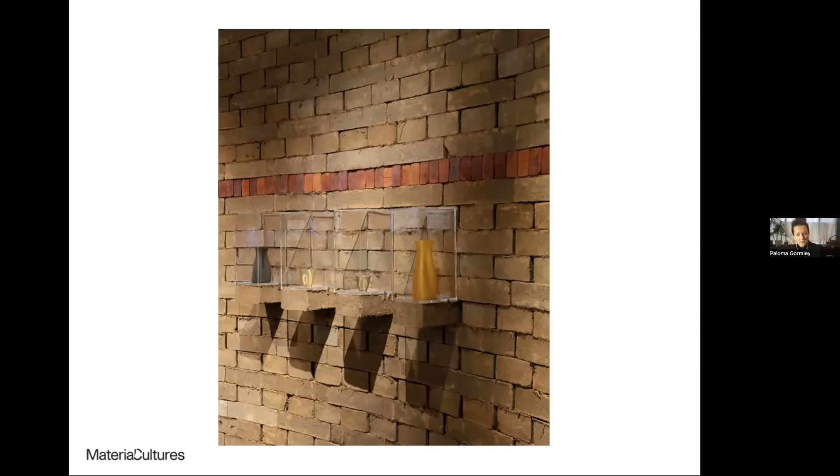Our work encompasses advocacy through design and curatorial work, where we can demonstrate the beauty, the adaptability, and the practicalities of working with low embodied carbon materials, as well as the extraordinary impact that they have on the thermal performance and embodied carbon of our building stock. Sorry, I lost my way. They also have extraordinary potential to make beautiful contemporary buildings.

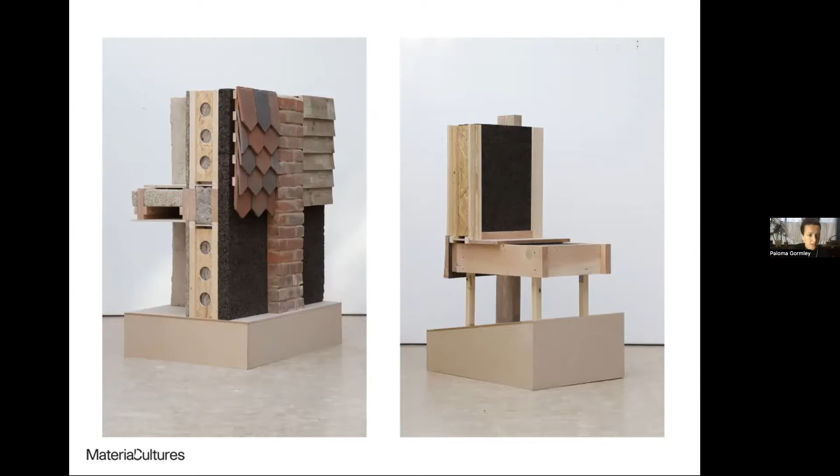We teach currently between the three of us, both at Central St Martin's and the Architectural Association. In this project, which is called Carbon Copies, our master's students investigated the impact of translating a series of iconic residential typologies into a fully bio-based low carbon material palette, building fragments of them at 1:1, which you can see here.

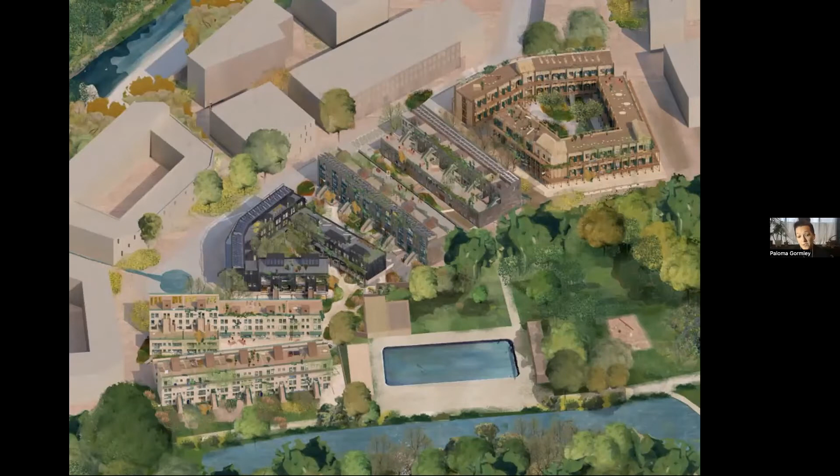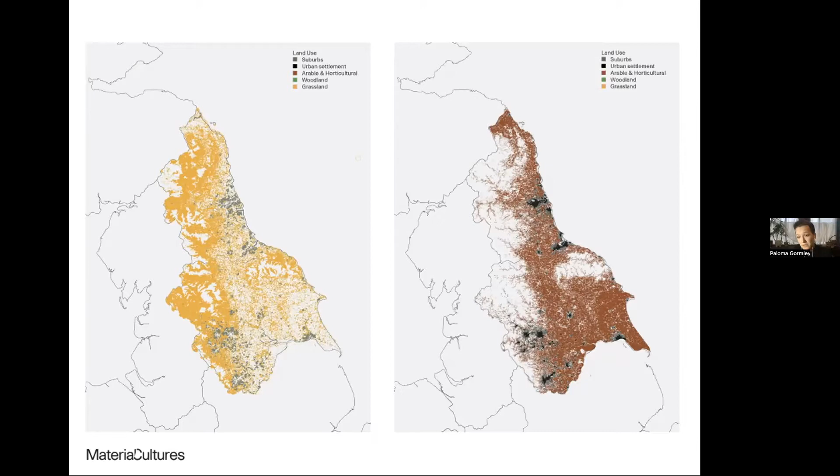We also design buildings and construction systems, and systems that can be applied at scale to new build developments. So we work with clients to develop urban propositions which can be integrated into off-site fabrication strategies, working with regional bio-based material supply chains. We also carry out research, so into materials and their application in construction, as well as their impact on our culture and our landscape. So to give you a bit of context of our work, we're looking to support systemic change in the construction industry.

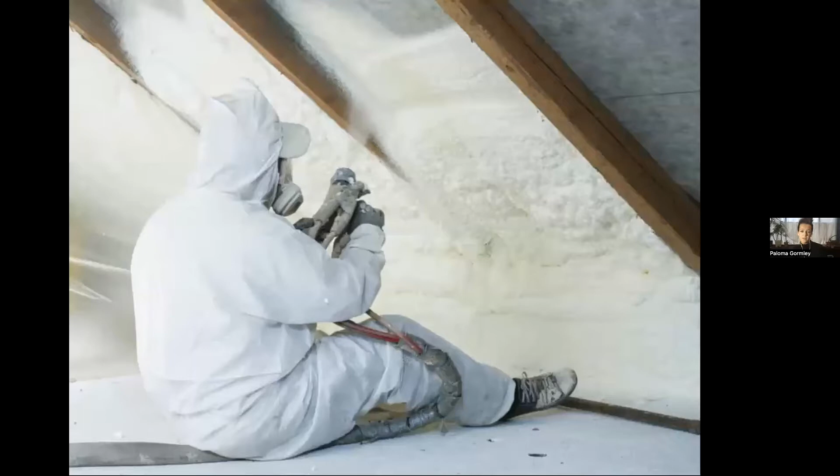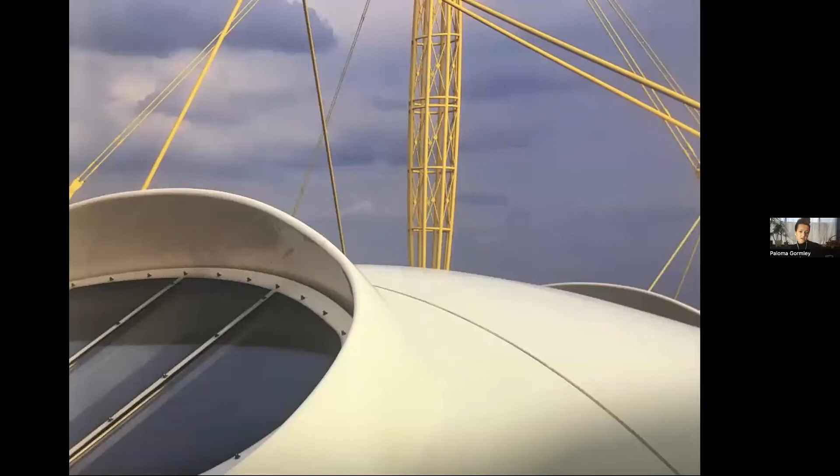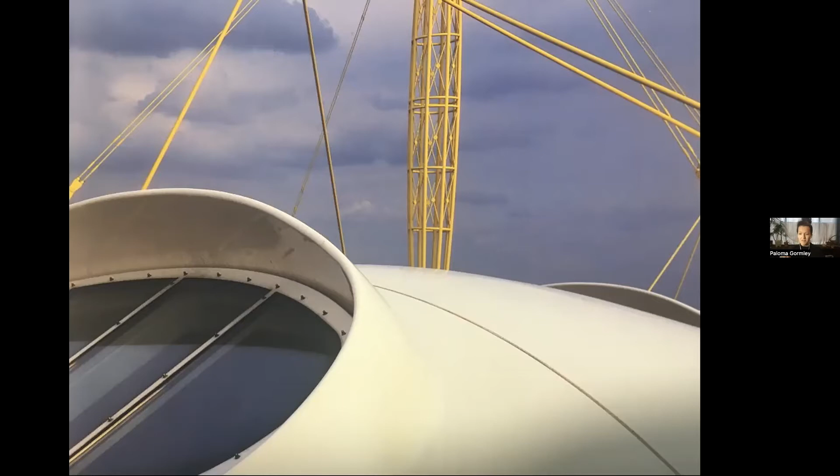And for the last 50 years, we've been using crude oil to try and solve the problems of sustainability in architecture. Our construction industry has produced a multitude of oil-based insulating and high-performance products, from polyurethane and polystyrene insulations to nylon thermal resistors, PVC, airtightness membranes, etc. And we develop construction technology using materials like steel and aluminium and glass, whose availability is dependent on a vast quantity of cheaply available oil, such as air conditioning systems, heat recovery units, triple glazing. These technologies are neither durable nor are they expected to last.

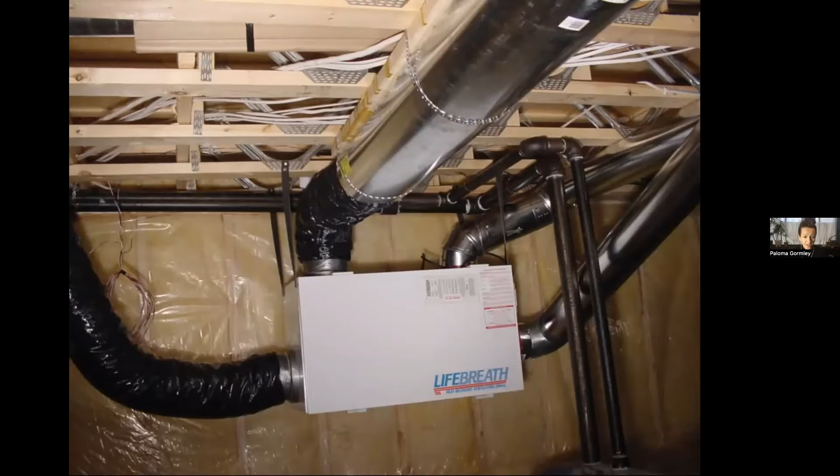Most contemporary buildings require specialist knowledge and equipment to maintain, knowledge that's easily lost, often economically inaccessible to people, and depending on parts that readily go out of production. This technification of architecture has concentrated power in the hands of the technocrats. Our current material culture transforms vast quantities of extracted material into vast quantities of waste, and it does so extraordinarily efficiently. This is the oil age of architecture.

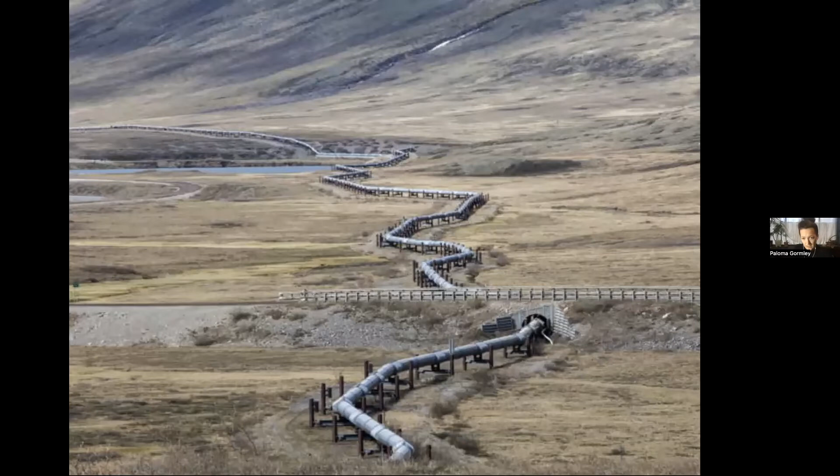The circular economy is the idea that in order to think meaningfully about sustainability in relation to human production, we need to consider the entire life cycle of everything that we produce. And embedded in this are three key material cycles, so composting, recycling, and reuse.

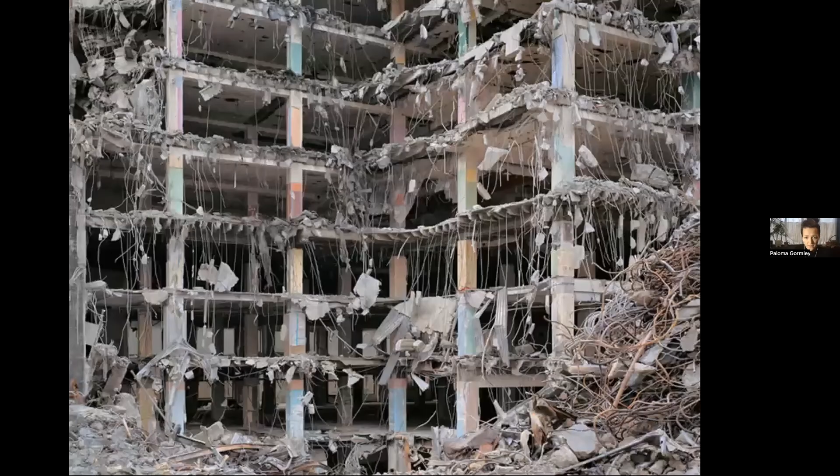Due to the number of components and their complex dependencies, implementing reuse and recycling in construction in a meaningful way represents an immense and potentially insurmountable logistical challenge. Ultimately, it demands vast warehouses, distribution networks, and mass standardization. It must also acknowledge the inevitable entropy and significant loss of energy, carbon, functionality all along the way, and the significant energy required to redistribute and recycle elements.

Yet it is interesting that of the three cycles, composting, recycling, and reuse, reuse and recycling seem to be receiving the most investment. Why? Perhaps because reuse and recycling maintains the logic of capitalist growth. The often fanciful narrativization of the future justifies the continued use of the high energy materials that we've become so dependent on, and allows us to maintain the status quo. These narratives often ignore the inevitable externalities of these processes.

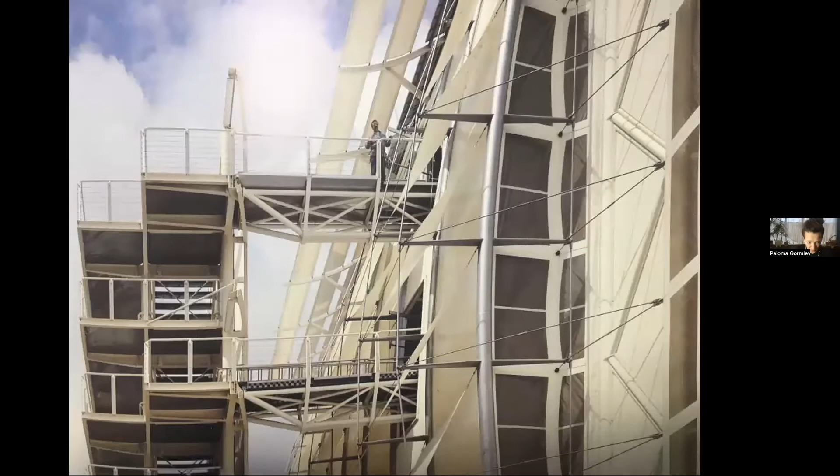So every time, for example, that we recycle plastics, we reintroduce particles into our waste streams, into our environments, and into our oceans. We are fast learning that we need to remove plastic from our material cycles, not perpetually reintroduce them. Reuse and recycling very quickly become highly technocratic.

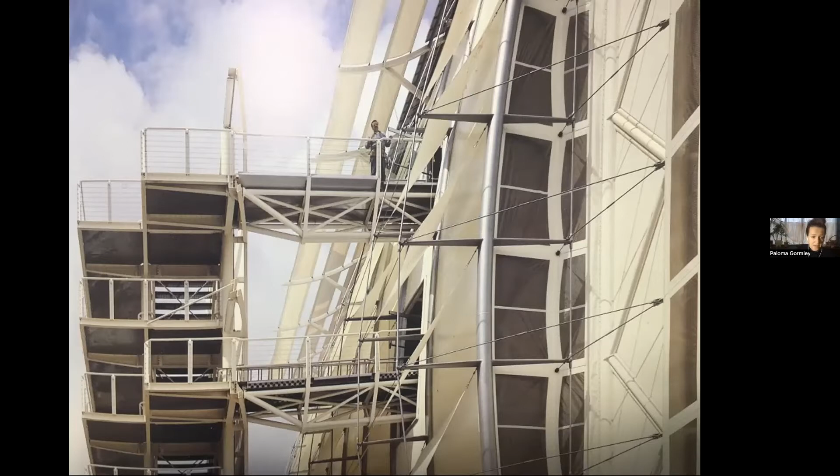Standardization means fewer authors, and we lose sight of architecture as a crucial mode of cultural production, and further consolidate the almost total monopoly of the white, male, and technocratic author. Or perhaps, as bell hooks might say, in this move towards standardization, you can see the mechanisms of the white supremacist capitalist patriarchy at work.

The reality is that the circular economy is not possible with the materials that we currently depend on. So what's the alternative? And how do we respond to the evolving needs of society without the disastrous effects of our current modes of production and growth? This is how nature deals with waste, through composting, fermentation, microbial digestion, and decomposition. These processes reintegrate matter into natural carbon cycles, where it has the ability to regenerate and regrow.

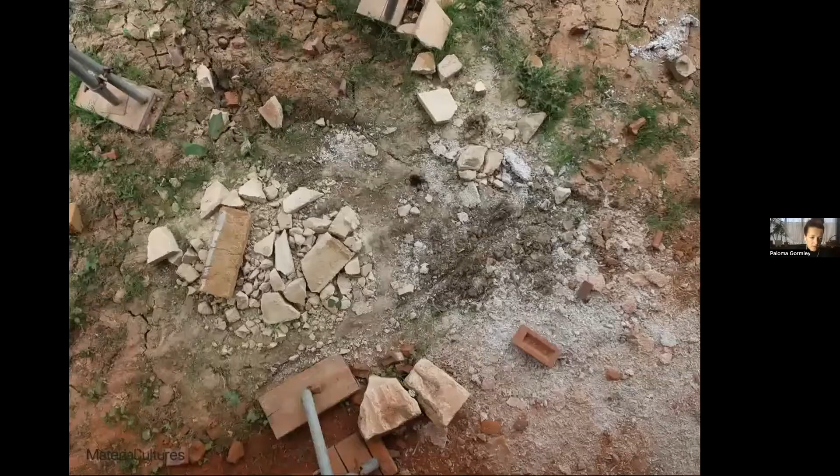At Material Cultures, we are interested in what happens when we work with construction materials that can remain part of biochemical and nutrient cycles. A mode of construction where at the end of the life, the constituent parts of a building could simply return to the ground. In this mode, materials are not contaminants, they come from and they belong to the landscape. And this is how things were made for thousands of years.

Biological processes such as anaerobic digestion can transform waste into things like biogas, which is already happening at scale across Europe. Limes and clays have for centuries undergone careful fermentation processes in order to condition them and improve their performance. This is material technology that is also at risk of being forgotten. These materials have an inherent plurality. They can accommodate many authors and unlimited standards.

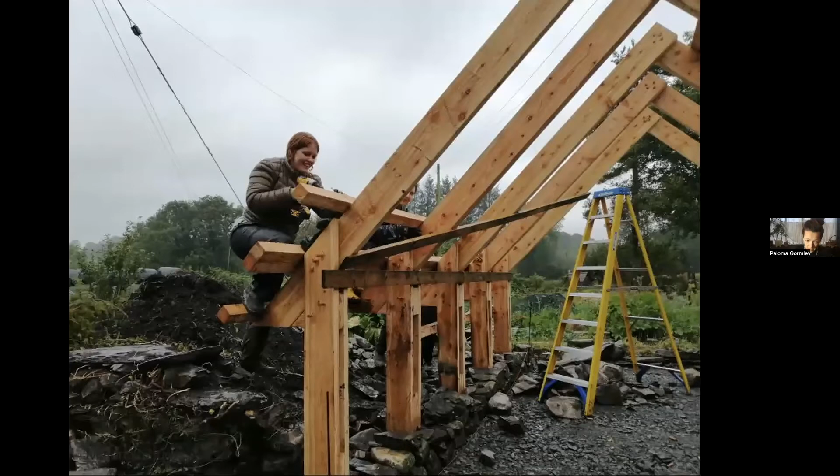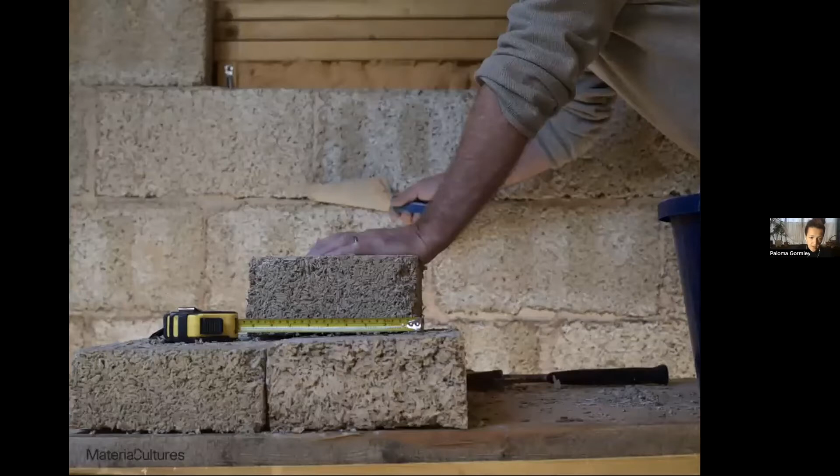In fact, bio-based materials generally sequester rather than generate carbon. They're accessible, they require few specialist tools, and you can work with simple detailing in construction and there is often something intuitive about working with them. They allow architecture to be culturally generated and perhaps suggest a different type of relationship to a building, situating architecture in relation to care. A care which requires human investment and a different set of relationships to place and the formation of new cultures.

Bio-based materials can be produced efficiently at a regional scale and integrate with existing crop cycles. So the other implication is the possibility of architecture to rebuild a direct relationship to place. This means things traveling less far and therefore it being easier to return and to assimilate them back into the ecosystem. In this way, you can see building as a gathering up of bits of the landscape.

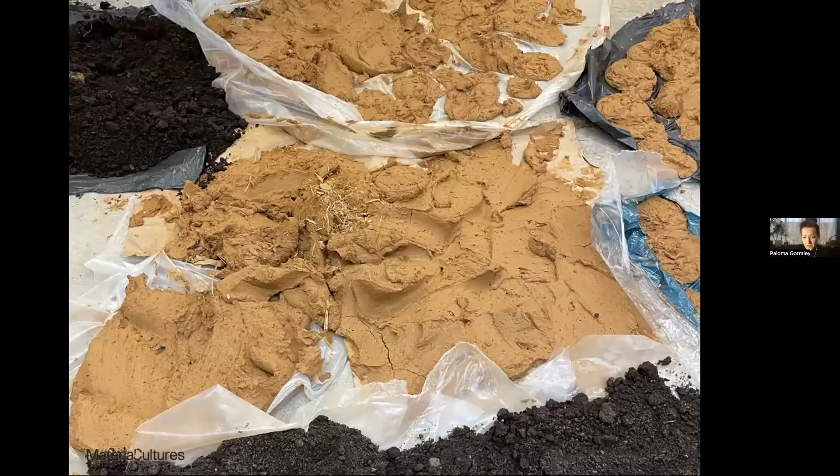Coming straight from the ground, these materials invite direct contact, experimentation, and play. And this is at the center of our practice, Material Cultures, as there is still a huge amount to learn and to relearn. Perhaps this direct relationship with materials is a way for us to find new languages that have the potential to supersede those we've inherited from a historically narrow lineage of authors.

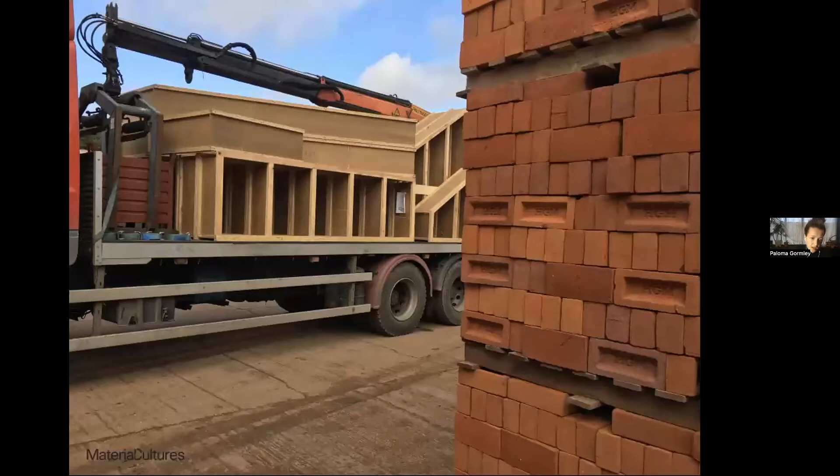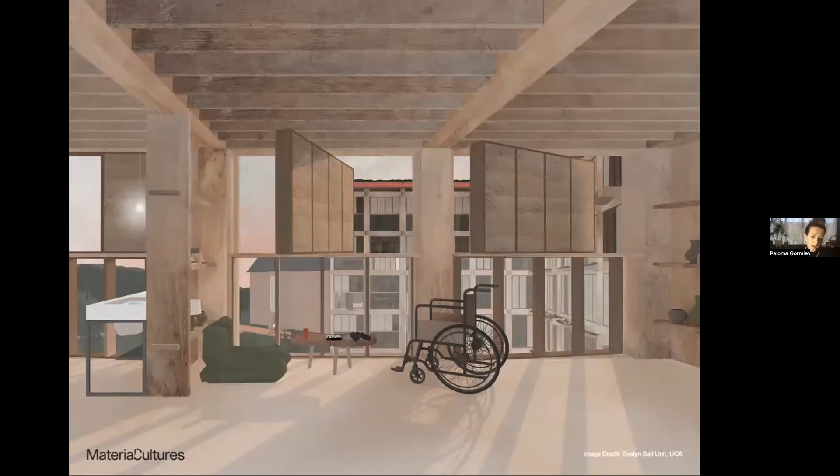Our approach might be considered Arcadian, but we're also interested in the role of contemporary tools and modes of construction, meaning building off-site where practical and working with efficient forms of mass production. The problem itself is massive and it needs to be met at scale. So in order for change to come quickly enough, the status quo needs to be challenged on ecological and economic terms. This means embracing digitalized construction processes where repetitive, non-specialist labor is carried out by machines.

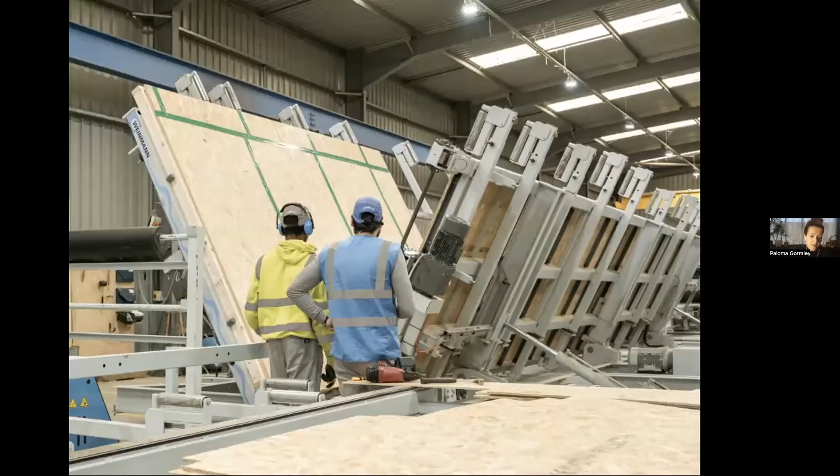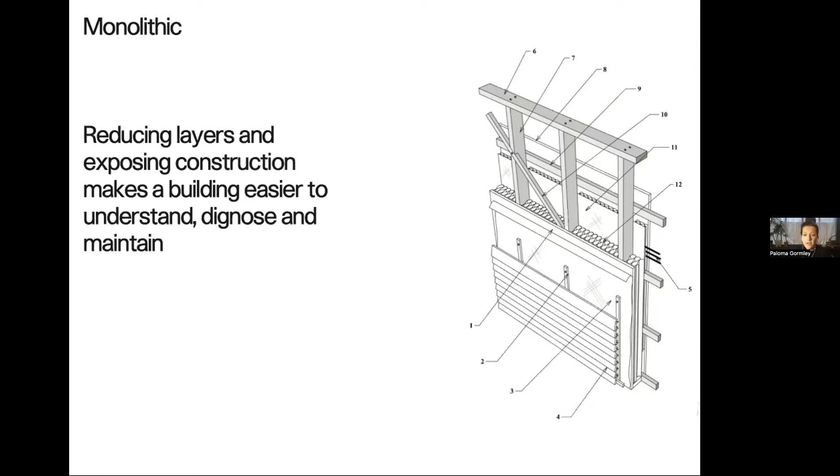And off-site, we have the ability to improve working conditions, change cultures, and to reimagine factories as sites of creativity and cultural production. So from our work over the last decade, we've developed a set of principles. These are around monolithic construction, so moving away from this contemporary, very layered mode of making buildings.

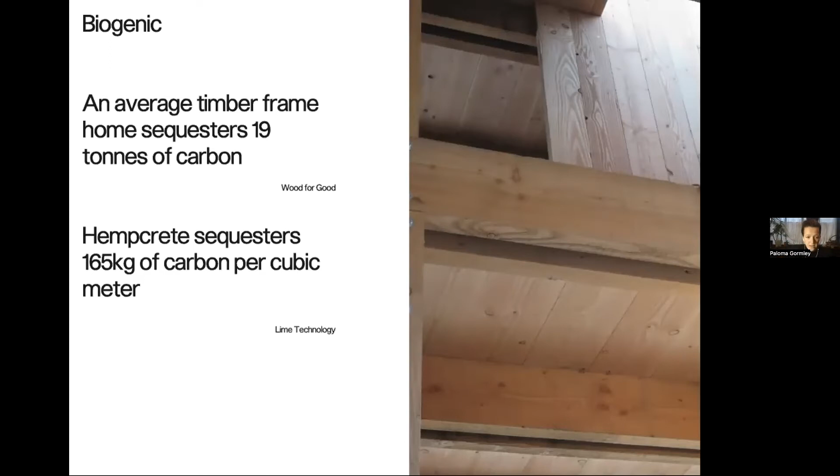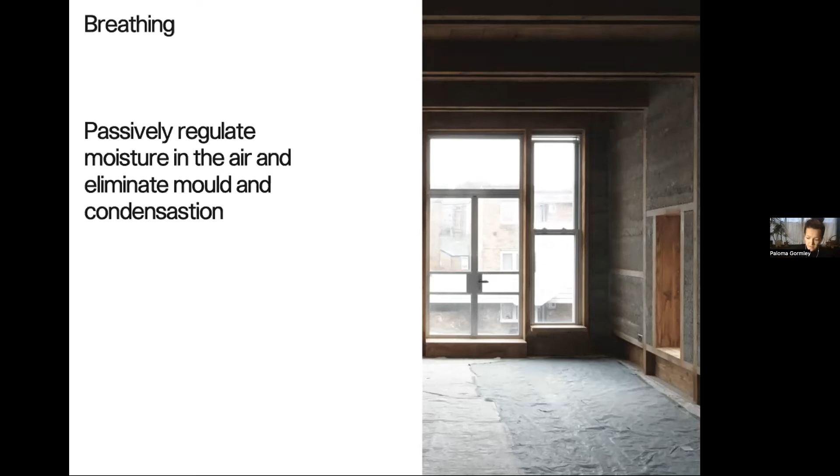Thinking about sequestration wherever possible, so building in bio-based materials that sequester carbon over their growth span, which is then locked away in the fabric of the building. Breathing construction: buildings historically all used to breathe, and it's only relatively recently that we introduced membranes and this idea of non-breathing construction. So returning to breathing construction, which also brings passive regulation of humidity and all kinds of other benefits.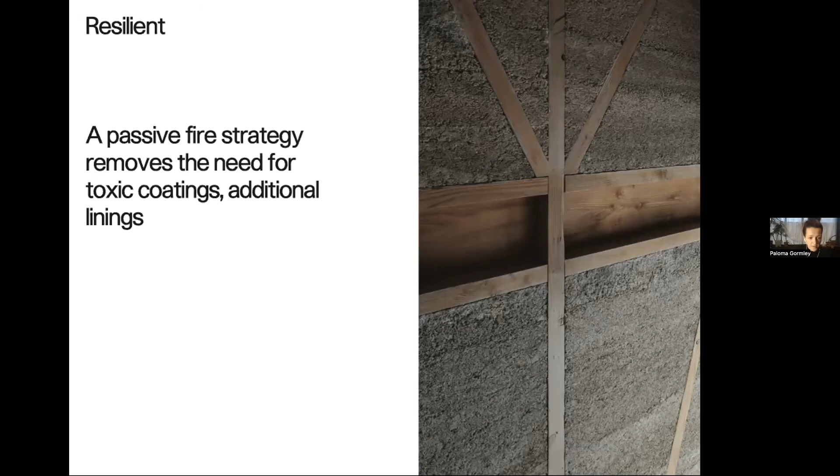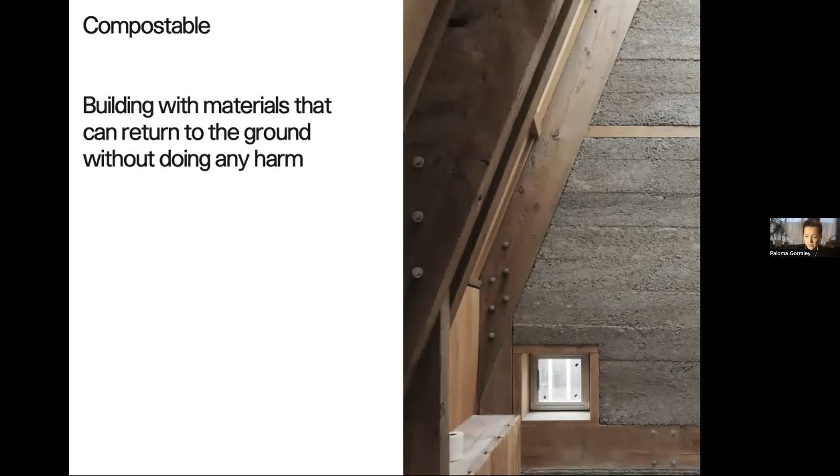Building resiliently, so rather than using toxic intumescent coatings, thinking about how the materials themselves can have integrity in response to fire and other environmental conditions. And making buildings compostable. Ideally, components of the building would be recycled, but ultimately at the end of their life, we aim for the materials that we use to be returned to the ground as compost. And then scalability, this is really at the core of what we do. So using experimental projects to think about how these ideas can go mainstream, essentially.

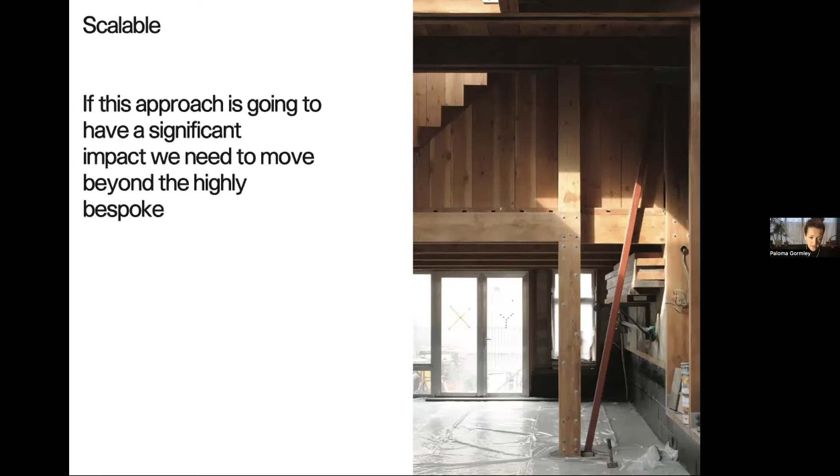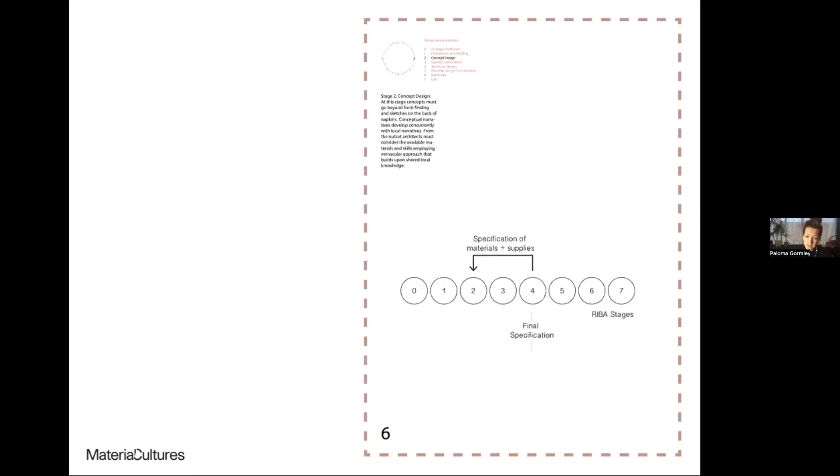One of the things that needs to happen in terms of the architectural design process is rethinking at what stage different things happen. A key thing for us is shifting the specification of materials much earlier on in the design process, understanding the capacities and limitations of the materials that are regionally available. This might, for example, mean designing a structure around a greater number of smaller timbers rather than fewer larger timbers. So the material availability begins to determine an overall construction system and the logic for construction.

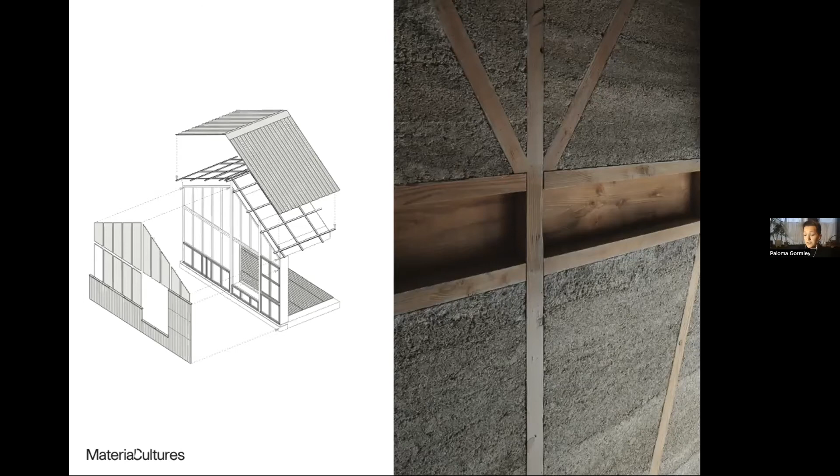And in looking to design out concrete wherever possible, we're developing alternatives for foundations that respond to geology using materials such as chalk, for example. And we're working with organisations such as Local Works in the UK to further explore the potential of chalk for cladding and finishing applications.

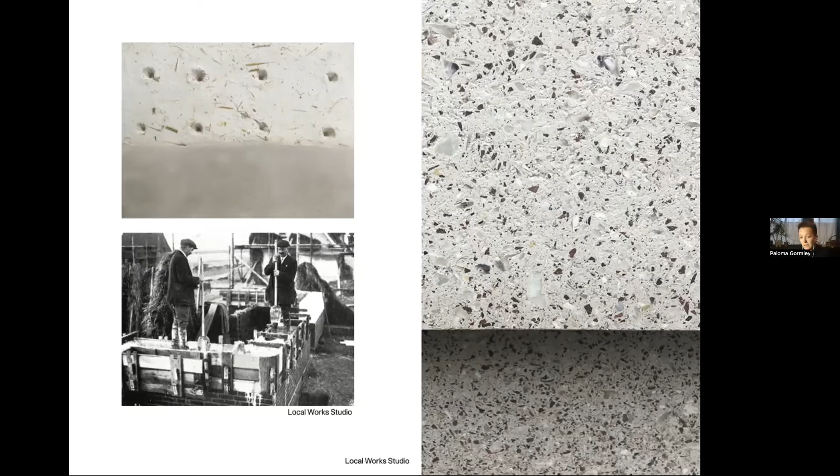Beyond timber, we've been working with a variety of bio-based feedstocks. Unlike trees, whose crop cycles are measured in decades, materials like straw and hemp are harvested annually. And hemp in particular has an extraordinary capacity for sequestering carbon, both in the plant matter above ground, but also they recarbonize the soil with their long tap roots. The stem of the hemp plant is composed of a woody core known in construction as the shiv or hurds, and an outer layer of fiber.

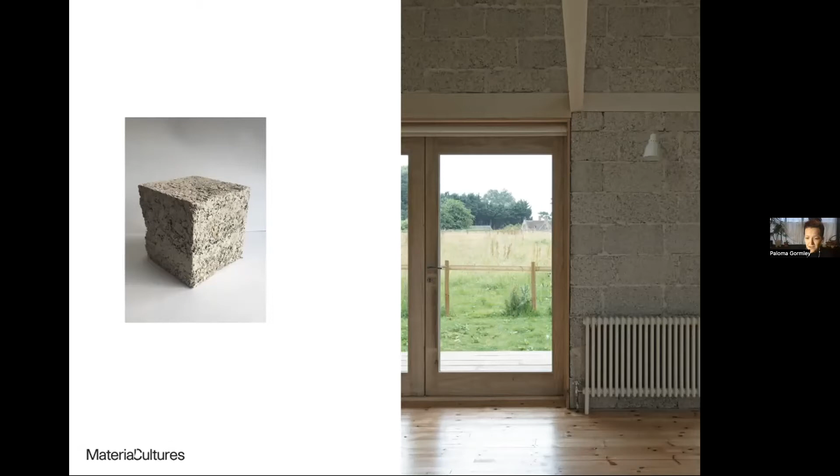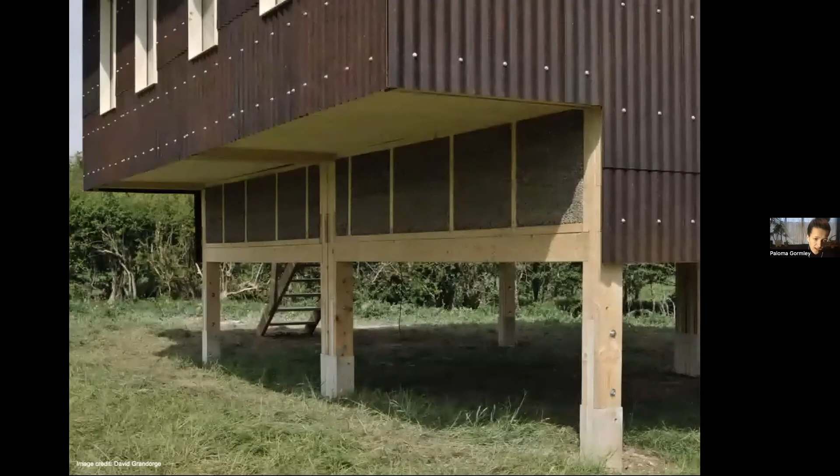When you combine lime and hemp shiv, you get a crude monolithic material known as hempcrete. This can be cast into blocks and laid with lime mortar as if they were cement blocks. It can also be cast in situ against shuttering. The sequestered carbon is held in the organic matter until the end of the building's life. The shiv holds the air and acts as an insulator and gives mass and bulk to the material, and then the lime binds the shiv together and makes the mix highly fire and mold resistant.

The fiber has any number of applications. It's used in textiles, it's used in rope, it's incredibly strong and durable, and we've been working with it in other applications such as cladding, working with bio-based binders.

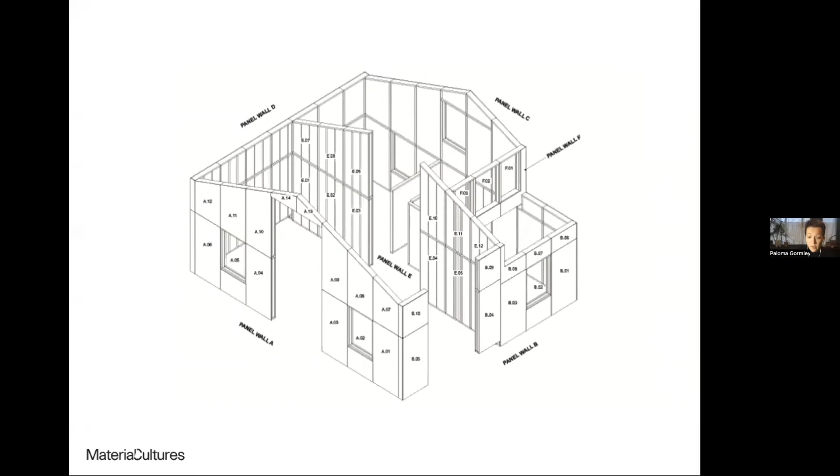So for Flat House, we explored this cassette-based system. There are limitations with casting in situ. It brings a wet and messy specialist trade to site, and the drying times also limit the seasonal construction window, and they elongate programs due to long curing times. You can't apply the finished layers sometimes for months. So we developed a system of precast panels that can be made in the factory, and this means they can be pre-dried and assembled on site in a matter of days.

We're developing proposals for how these ideas that we developed for Project Flat House can be applied on an urban scale. Looking at how on-site microfactories can produce the construction components and how modular systems can be used to create rich and varied streetscapes. Places with character and texture that can support many forms of life, and that rather than degrading over time, age beautifully.

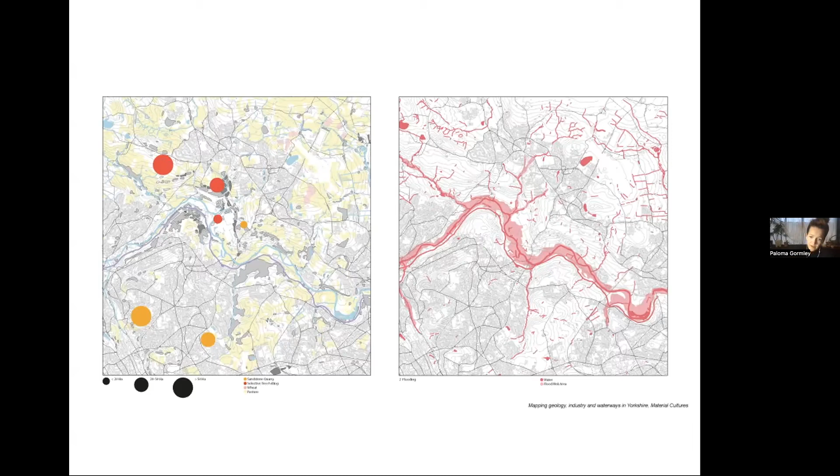But are we beckoning in a new era of ever more intensified industrialized agriculture? And can this be mitigated? What other non-human systems are dependent on the landscape, and how can we maintain them in the process? Last year, we worked with the North East and Yorkshire to develop a strategy for a bioregional construction economy. We looked at how to enable the production and take-up of bio-based products and how agroecological processes might be integrated into this transition and what their impact might be on our landscapes.

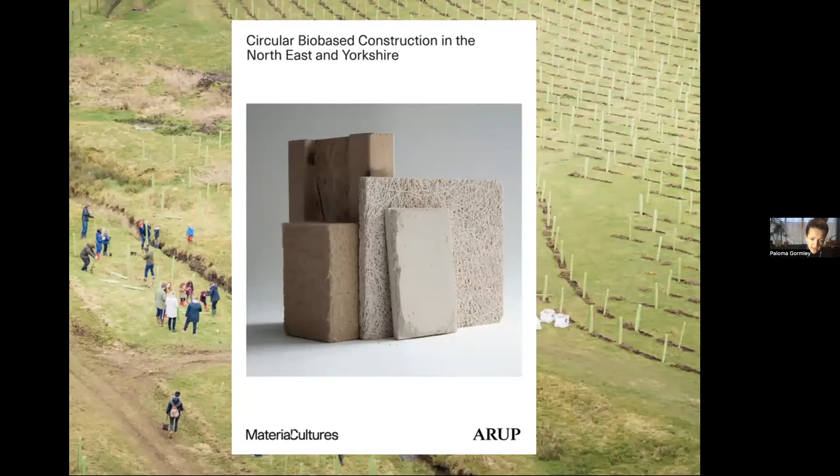The report was developed collaboratively with our partners Arup, and the research looks at the viability of the circular and bio-based construction economy, from the potential benefits of a transition, as well as the limitations of the one today. We also looked at the actions that the industry needs to take to achieve a cleaner, decarbonised construction industry and to bring about systemic change.

We looked at how you can begin to quantify these benefits. So we started with counting and a detailed analysis of the local plans of the 31 local authorities within the North East and Yorkshire. It's estimated that approximately 30,000 homes need to be built annually, or 500,000 homes by 2038. In embodied carbon terms, and using today's benchmarks, this would generate more than 26 million tonnes of embodied carbon.

So we looked to develop a model through which we could assess the potential long-term impacts of a bio-based industry. And so we picked as our subject a new build 3-bedroom semi-detached house, analysing the impact of this generic type of suburban home on the landscapes of the region. We carried out our analysis by reviewing the impact of switching out 3 crucial material applications in the building: the structure, the insulation and the lining. Many of the findings set out are directly applicable to retrofit projects as well.

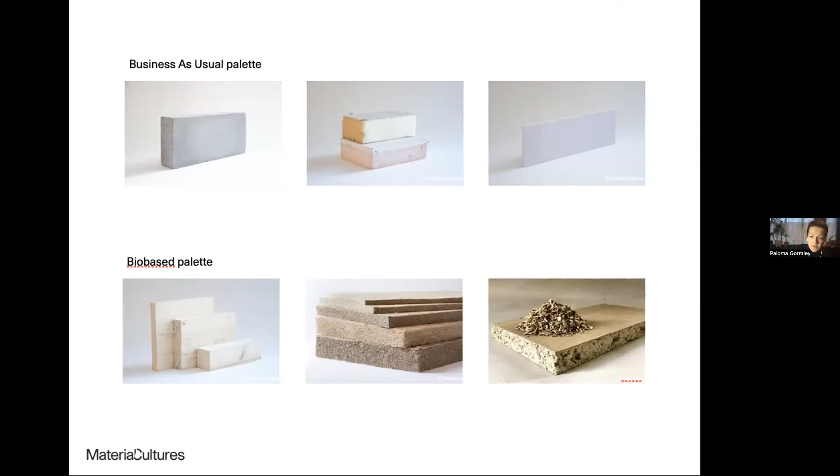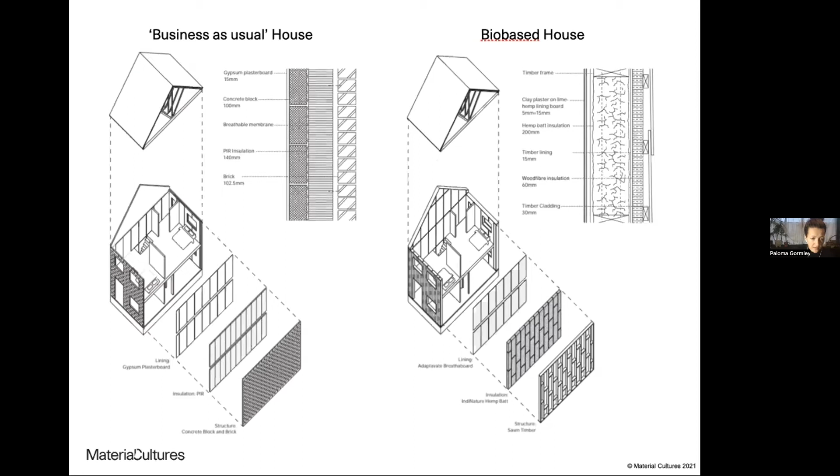So we carried out an embodied carbon assessment on the superstructure of both the business as usual and the bio-based small-scale residential home. Both were designed to contemporary building standards, so they had the same level of thermal performance. On the left, you can see a breakdown of the embodied carbon and the associated sequestered carbon for each of the designs. And on the right, you can see the net embodied carbon associated with these components, i.e. the embodied carbon subtracting the biogenic contribution.

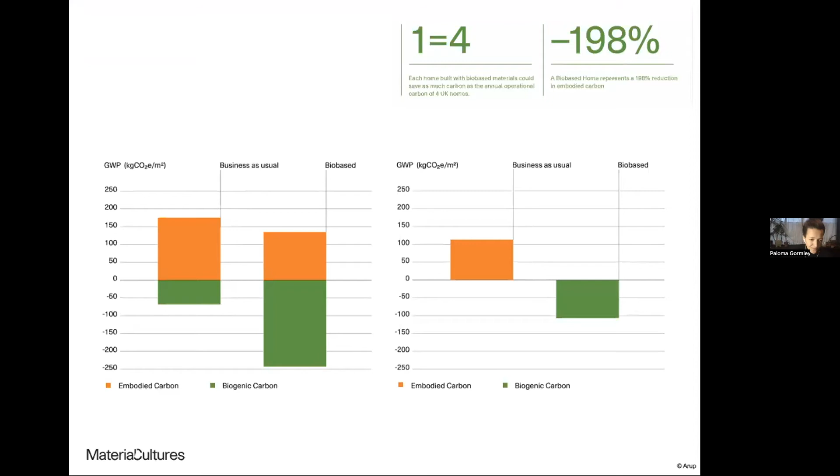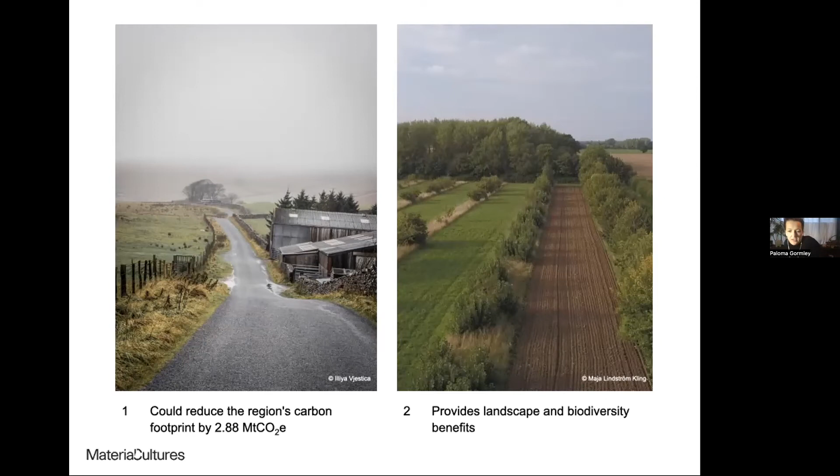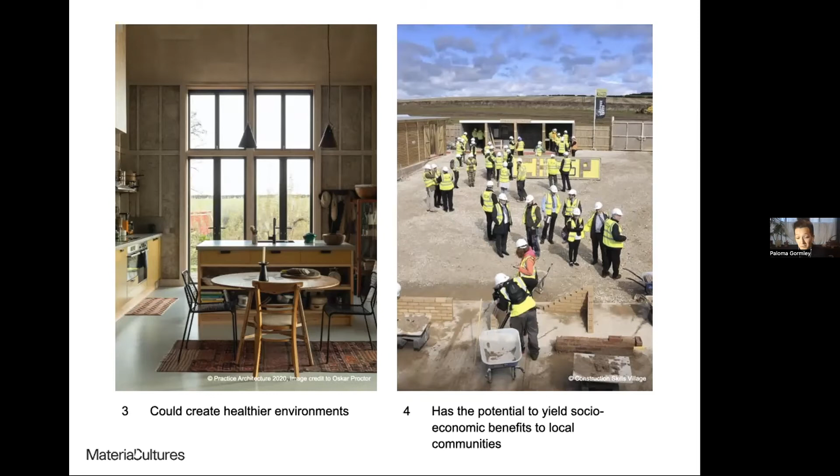So a bio-based and circular economy would support the region and the country in decarbonising. Building 500,000 homes with bio-based materials instead of conventional ones could save nearly 3 megatons of carbon emissions. We know these materials can also help to create healthy environments, not just in the final buildings, but also for people throughout the supply chain. Finally, we identified that the bio-based material supply chain would give the opportunity to create jobs, improve skills, and improve skill sets where this is needed the most.

The future of a decarbonised built environment depends on previously disconnected industries working together to facilitate systemic change. Our question now is, how can the competing demands on our landscape be reconciled in this post-carbon future? And how can reforestation and afforestation serve us and our landscapes ecologically?